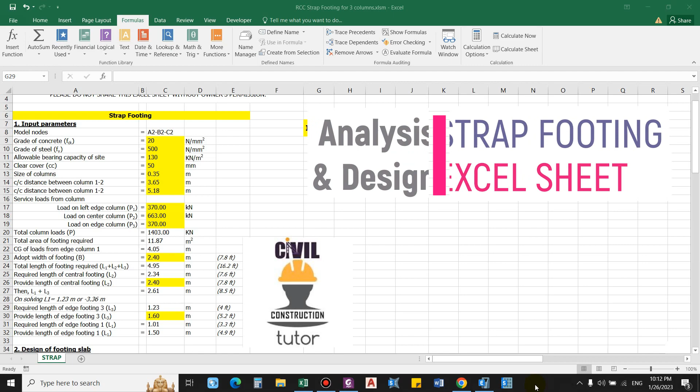In case there are 2 eccentric columns and a concentric column at the middle, we can go for this type of strap footing, and if it doesn't satisfy the bearing condition, we can go for a combined footing considering 3 different columns. The central column will be the concentric one, and the columns at the right and left edge will be eccentric.

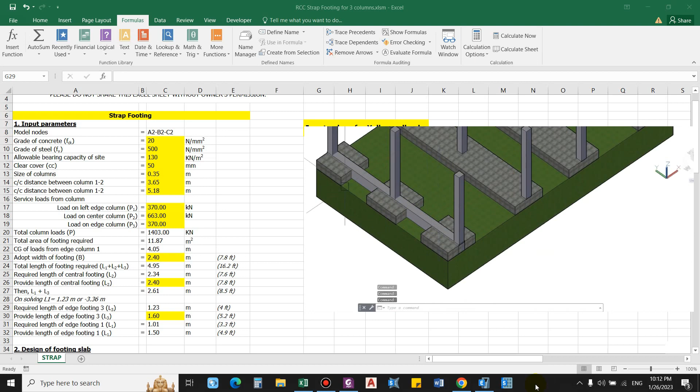In the previous video I already showed how to design a strap footing beam for 2 columns, where one column is concentric and the other eccentric. But in this case we have to connect 2 eccentric columns to 1 concentric column.

So here you can see, this is the concentric column and these are the eccentric columns at the edges, connected by a strap beam. Even in the footing plan you can see this case. If it's not satisfied for bearing, we have to go for a combined footing considering 3 columns.

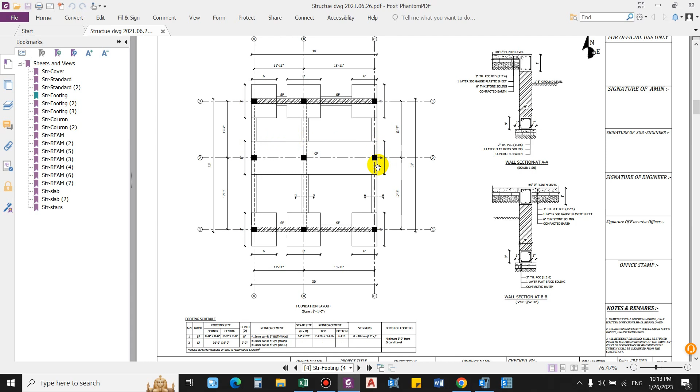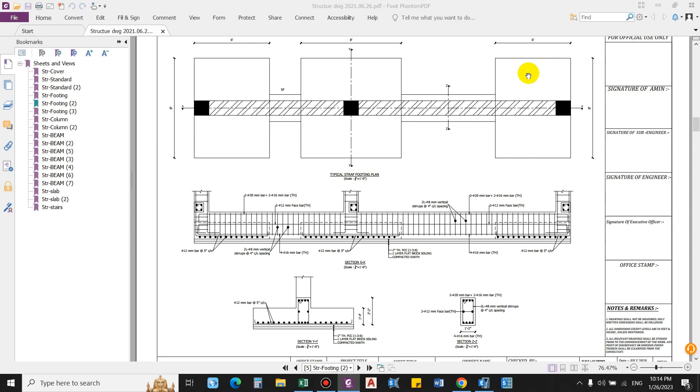Somehow the design is similar to the strap beam for 2 footings, but we have to add the additional center to center distance of the column for this case, and that will be the difference here. So let us assume this as F1, the left footing as F1, F2 and F3, and accordingly we will substitute the value in the yellow cells only.

For the model nodes, let us go to the ETABS file, plan view base. From the ETABS file we will consider the reaction at the base, considering reaction load combination, that is for dead load and live load only, and we will get the load that is the base reaction.

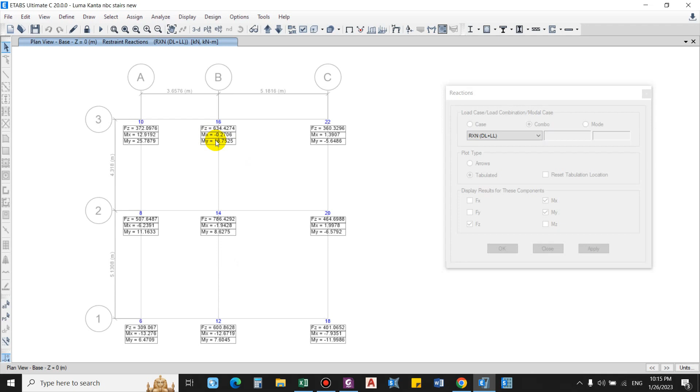We'll select the most critical one. So for now let us select this one. Model nodes, that is A3, B3, C3.

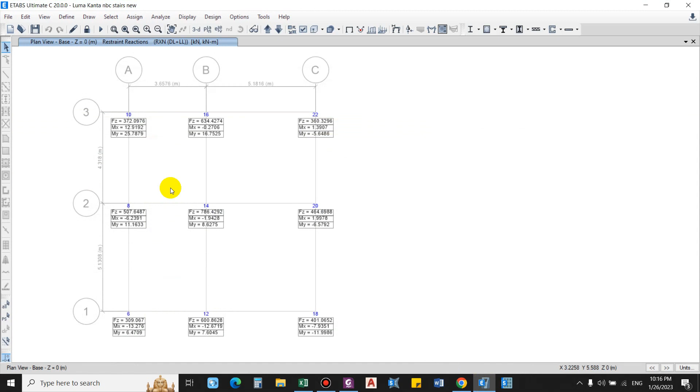Grade of concrete 25, grade of steel 500, allowable bearing at site let us assume 130, clear cover minimum 50mm, size of column 14 inches, so 0.35 meter, center to center distance between column 1,2 and 2,3. So we are considering this as 1, 2 and 3, so 3.65 and 5.2.

Loads: 372, 634 and 360. So total column load will be the summation of these 3.

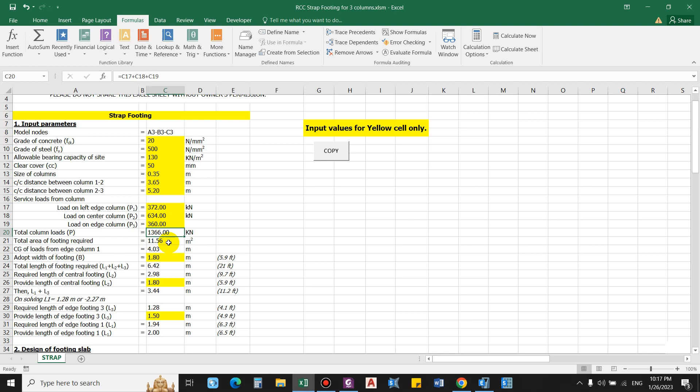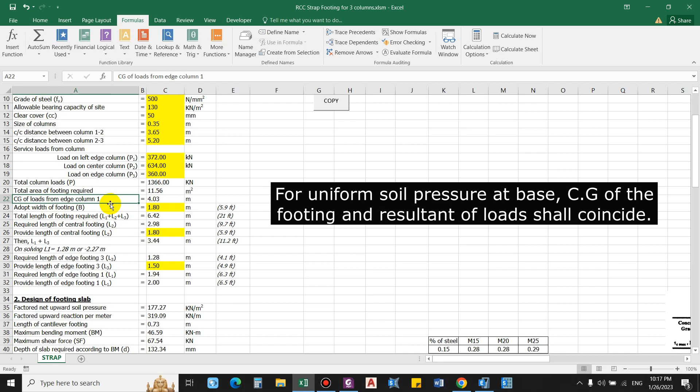Total area of footing required, basically total load divided by the allowable bearing, we get 11.56. The idea remains the same, that is the center of gravity of load and center of gravity of the footing must coincide at the same point.

So the CG of load, or center of gravity of load from edge 1, column 1, comes as 4.03, and let us assume the width of footing as 2.4 meter, and this will be 7.8 feet. Total length of the footing required is 4.82.

This is basically L1, L2, L3. Required length of central footing depends upon the central load, and this comes as 2.24, so provide as 2.4. Then L1 plus L3 comes as 2.58 meter on solving.

This is basically a quadratic solution, because we don't know the value of L1 and L3, so we'll put this in the quadratic nature and calculate the required value for L3, and obviously we'll have 2 values and select the most appropriate one.

Here you can see one value comes as 1.21 and the other comes as minus 3.42 meter. Required length of the footing at the edge will be 1.21, and provide length of edge footing minimum as 1.5. Required length of the edge footing, L1 plus L2 we know the value, L1 plus L3 we know the value, so we get 1.08.

So providing length of edge footing 1 as 1.5 meter as well, so 1.5, 1.5, 2.4, and width of all footing as 2.4. Now design the footing slab. The other things remain the same as per the strap footing I already uploaded.

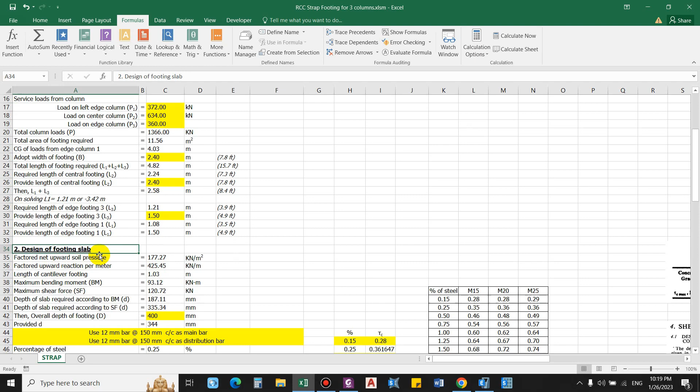Factor net soil pressure, factoring the total load by the area divided, to get factored net upward soil pressure per meter, multiplying this by width.

Length of the cantilever footing - along this strap footing we will not design, we will design in the transverse direction, so considering the length of cantilever footing 1.03 meter, maximum bending moment comes as 93.12 considering this cantilever length and the factored net upward soil pressure.

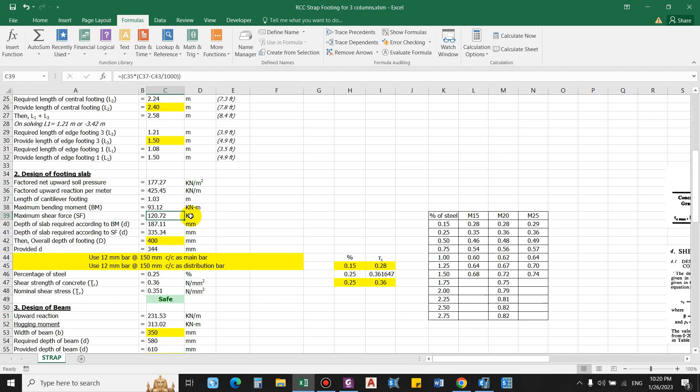Similarly, shear force WL for the cantilever comes as 120.72 kilonewton, and on the basis of these two, that is moment and shear force, we can compute the depth required: 187 mm from the moment criteria and 335.34 mm from the shear force criteria.

While calculating the depth from the shear force, we are considering the percentage of reinforcement as well, as we have already provided 12 mm here. So overall depth of footing, considering 335, we will provide overall depth as 450 mm, and the effective depth comes as 394.

Now let us provide the reinforcement. So 12 mm bar, let us assume 12 mm bar and spacing as 150, and for the distribution also we will provide 12 mm bar at 150 mm center to center spacing.

Percentage of steel comes as 0.22%, shear strength of concrete 0.34, and nominal shear stress 0.284. I have computed this from SP16 clause 4 using this formula. You can also use this table, that is table 19. So for now the percentage of reinforcement is 0.22.

So for 0.15 it is 0.28, and for 0.25 it is 0.36. This comes as 0.33, and from the formula it comes as 0.34. So it is almost equal, so you can use any of the formulas you want. So it is safe, that is the footing slab for shear and bending, it is safe.

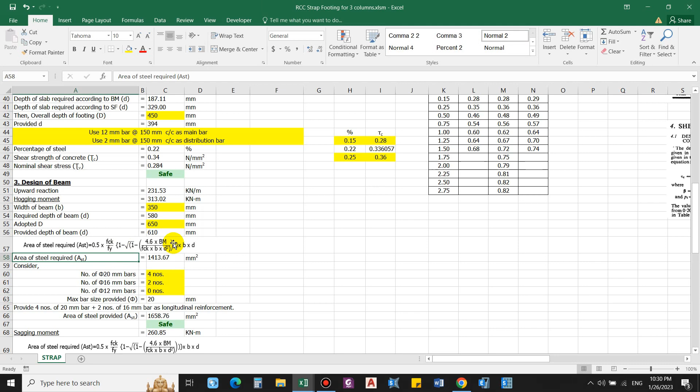So area of steel required, you can find this formula in the annex, that is 0.87 FY, something like that. For this, now we will arrange the number of bars. Simply here I have arranged 3 types of bar, and accordingly we will provide the number of bars and get a conclusion.

So to satisfy this reinforcement, we can provide a number of 20 mm bars, a number of 16 mm bars, and 12 mm bar, a combination of these 3. Or we can also provide 25 mm here, and this as 20 and this as 16, and accordingly we'll provide the number to get the conclusion.

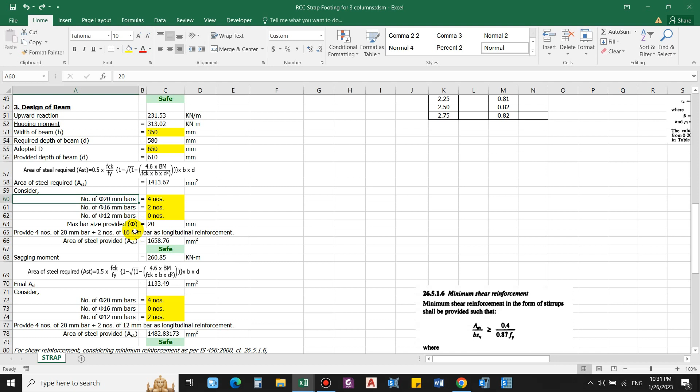If we put here 20, then you will get 20, 16 and 12 accordingly with the number we have provided. So for now let us provide this as 2, 4, this as 2 and this as 0. So we get 1658.76 mm square, which is greater than the required one, so it is okay.

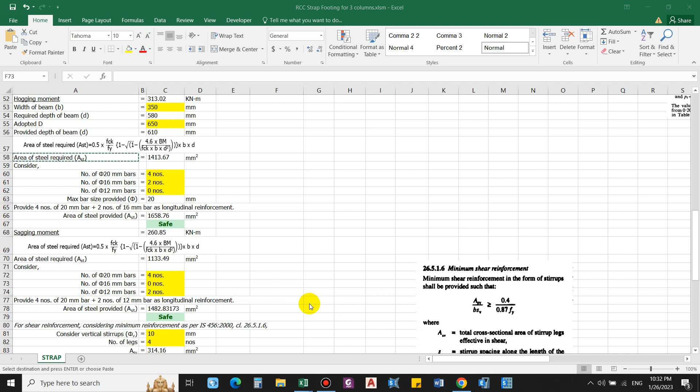Similarly, we'll also get sagging moment, and this is WL square by 24, and we get the area of steel required. For this area of steel, again we have to provide number of bars. So simply we can provide 4 number of 20 mm bar and 2 numbers of 12 mm bar as the longitudinal reinforcement at bottom.

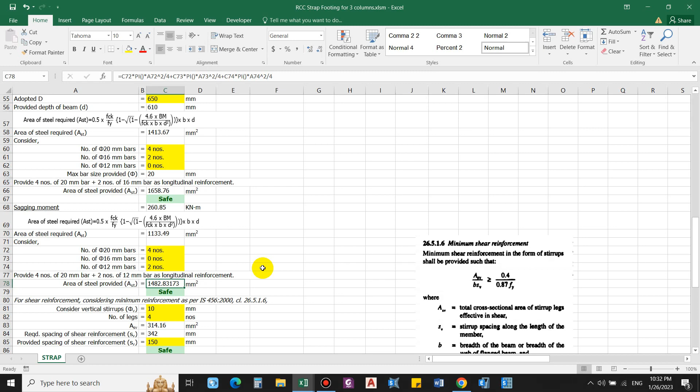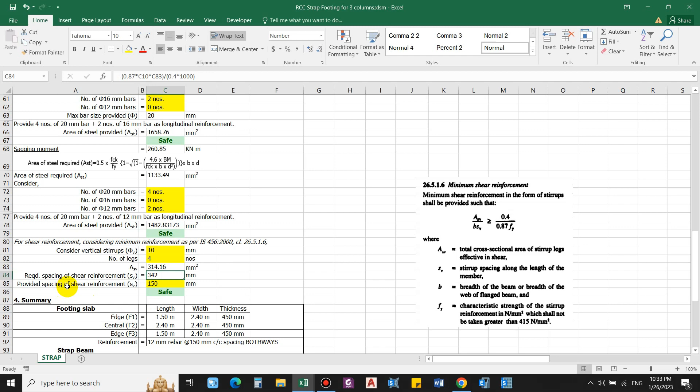Now for shear reinforcement, we'll just consider nominal reinforcement as per clause IS 456/2000. Considering vertical stirrups of 10 mm, number of legs, then the area of vertical reinforcement and required spacing. From this formula, providing the value of Asv, fy, b, we'll get the value of sv. So provided spacing of shear reinforcement is 150 mm, so that will be safe.

And at the end we have the summary, that is the footing slab. I have rounded up the value.

So in this way we can design the strap footing manually using this simple Excel sheet.